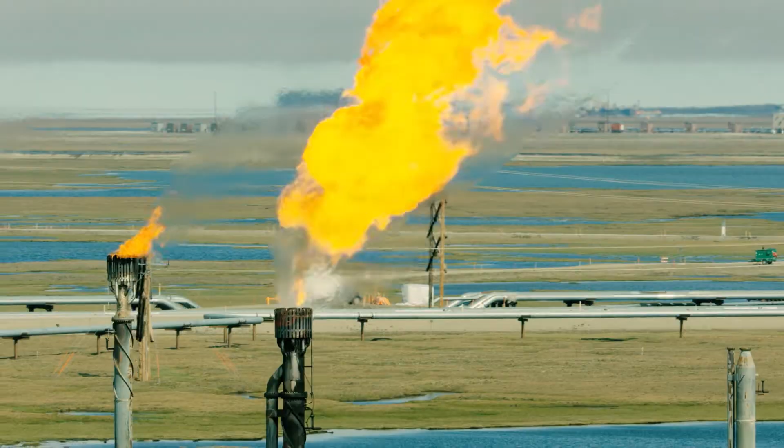Gas producers strive to ensure maximum supply efficiency. The cost of the gas is directly dependent on several important parameters. A key cost indicator is the humidity of the gas during transportation.

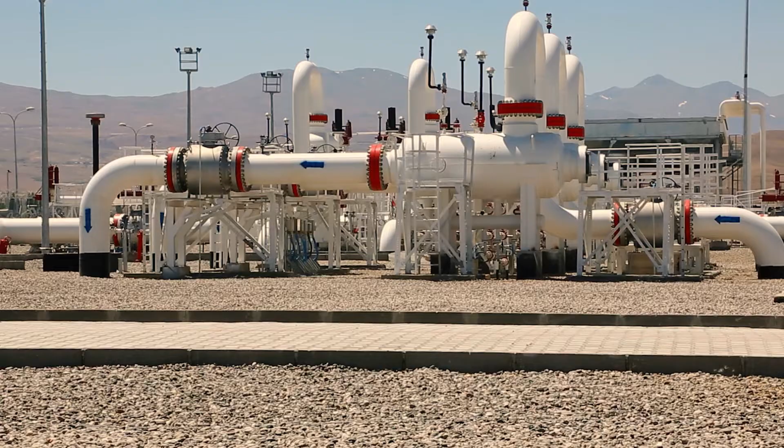This parameter must be constantly monitored because moisture condensation in the gas pipeline leads to the formation of hydrate plugs. This can cause obstructions in the gas flow, increasing the risk of accidents.

In addition, it has become increasingly necessary to install modern gas analyzers that have the ability to measure the hydrocarbon condensation temperature with a high degree of accuracy.

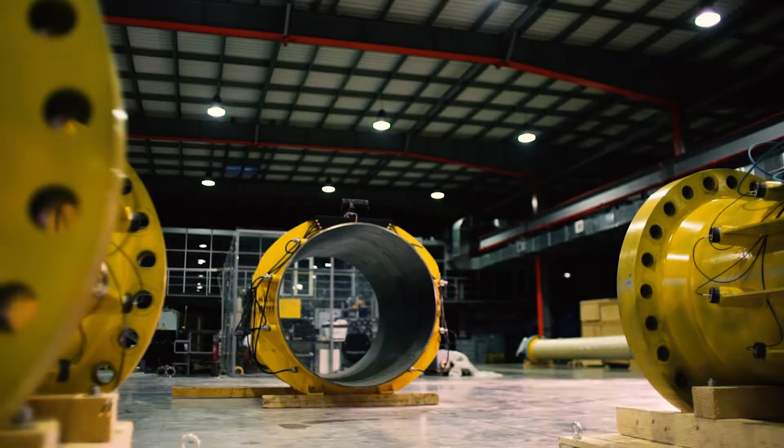Today, the most accurate method for measuring these parameters is the condensation method. This uses an optical system to register condensate formation on a chilled surface. This method is a first principle measurement. It is straightforward, reliable, and resistant to harsh conditions.

The traditional version of this method for measuring the water dew point is simple. The measurement cell of an optical system incorporates a metal mirror, the temperature of which can be regulated. A sensitive temperature sensor is integrated into the mirror. Heating and cooling of the mirror is achieved by means of a thermoelectric battery.

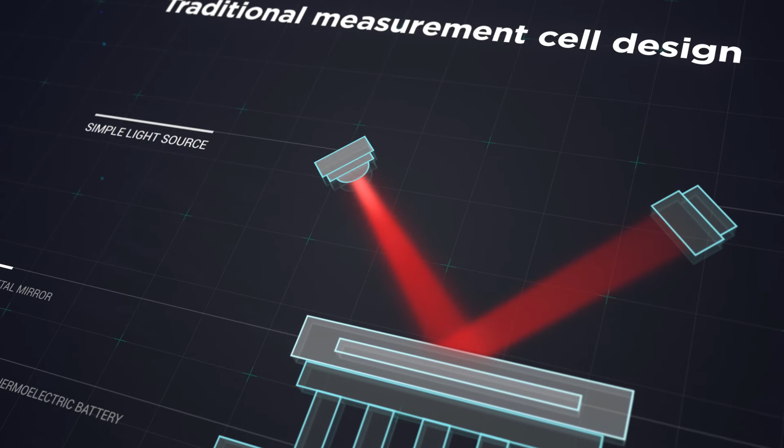A light-emitting diode, or LED, is used as a light source, and a photodiode is positioned to receive light from the LED as it is reflected from the mirror. When the mirror is clean, virtually all the light from the LED is reflected by the surface of the mirror onto the photodiode. This results in the photodiode producing a maximum level of photoelectric current.

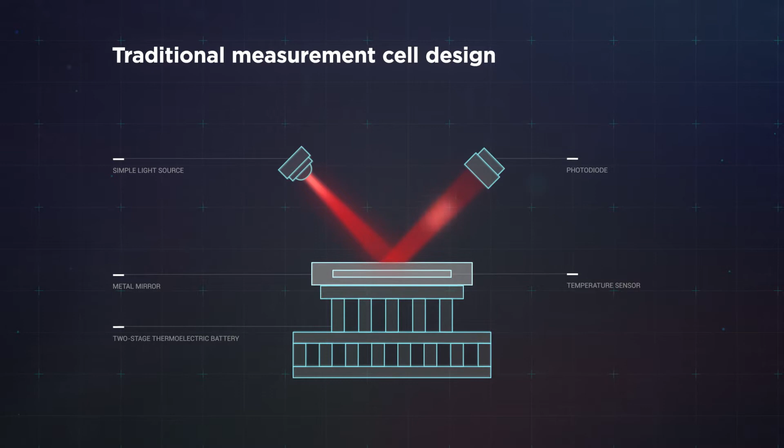But as the mirror is cooled, any water vapor begins to condense, forming droplets on the mirror's surface. These droplets act as tiny lenses that scatter the light from the LED. As a result, less of this light reaches the photodiode, and the photoelectric current it produces goes down. The mirror temperature at which the photoelectric current begins to decrease is registered as the condensation temperature.

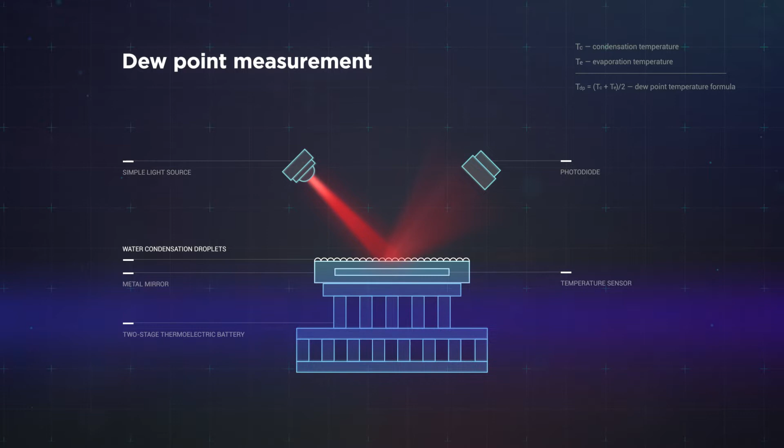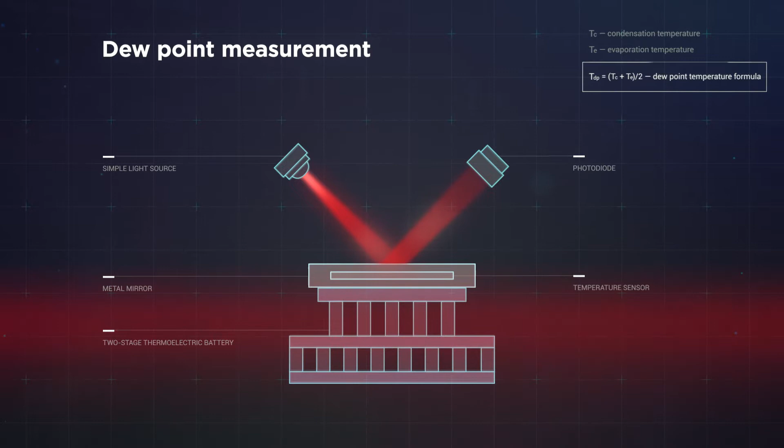Subsequently, when the mirror is heated, the reverse process takes place and the droplets of condensation evaporate. As this happens, the light from the LED is no longer scattered, and the amount of light that reaches the photodiode goes up again, resulting in an increase in the photoelectric current it produces. The temperature at which this increase begins to occur is registered as the evaporation temperature. The average of the condensation temperature and the evaporation temperature is reported as the water dew point.

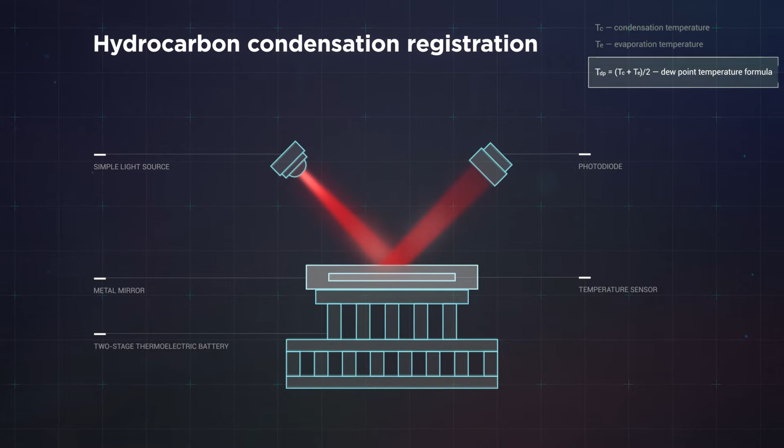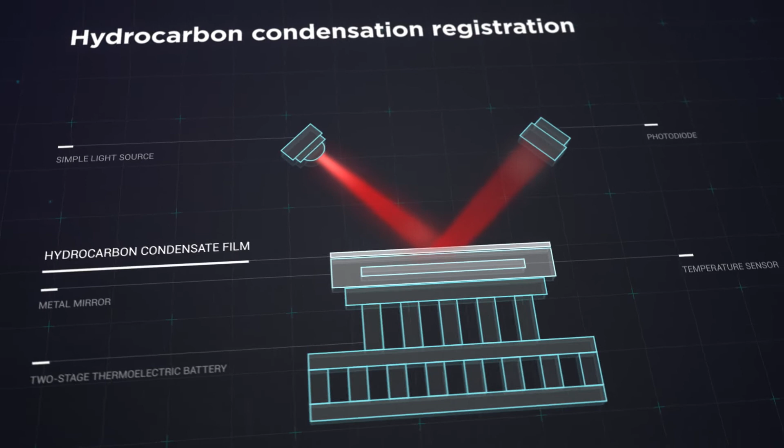But this type of setup doesn't work for hydrocarbons. During condensation, hydrocarbons do not form droplets, but a thin reflective film that does not scatter the light from the LED. Because of this, the amount of light reaching the photodiode does not decrease, so the beginning of condensation cannot be identified.

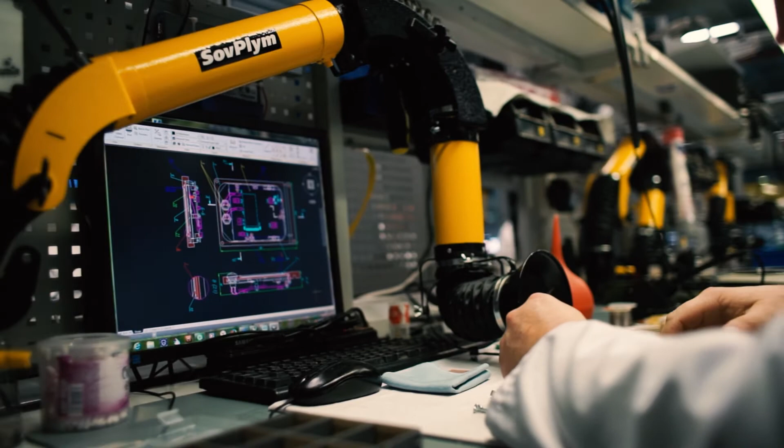A revolutionary method for measuring the hydrocarbon condensation temperature has been developed by the Vympel company. This method uses laser-based interferometric analysis and is based on the phenomenon of total refraction. Vympel's design features a vertically polarized laser as a light source and a chilled mirror made of a dielectric material.

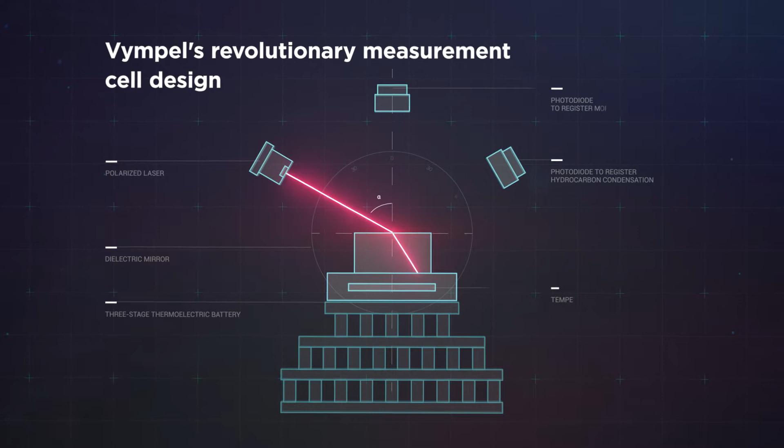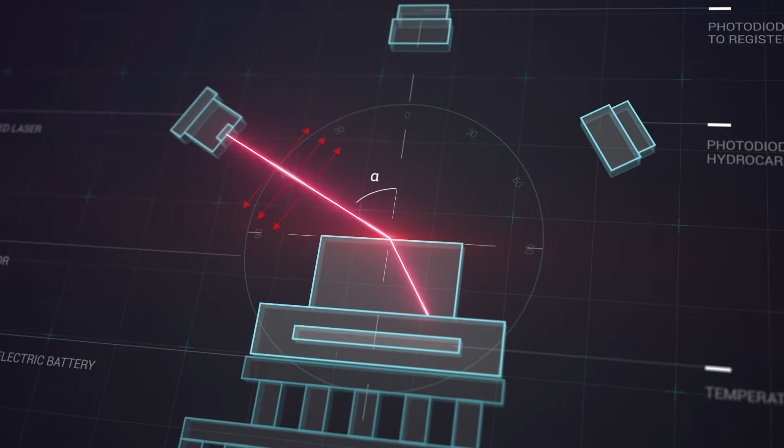The vertically polarized light from the laser strikes this mirror at a specific angle, known as the Brewster angle. This results in total refraction of the laser beam. When the mirror is clean, the laser beam encountering it at the Brewster angle is totally refracted. As a result, no light is reflected onto the photodetector, and it registers a zero signal.

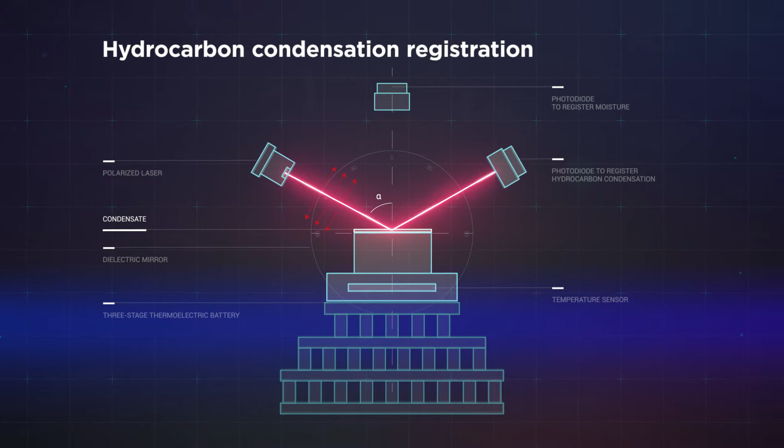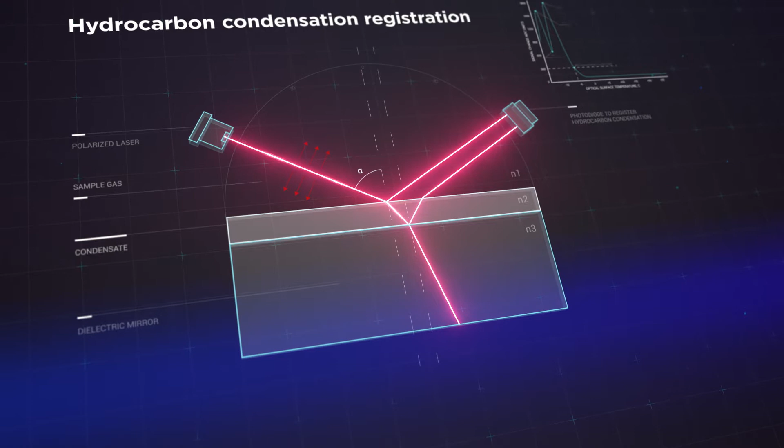But when a hydrocarbon film condenses on the mirror, total refraction does not occur. The light waves of the laser beam are partially reflected at the gas-film interface. At the same time, due to the optical transparency of the hydrocarbon film, a second beam of light appears following a slightly altered path. These waves are partially reflected at the film mirror interface.

As a result, the photodetector receives two distinct reflected beams of light, which are out of phase, and these beams generate a pattern of interference.

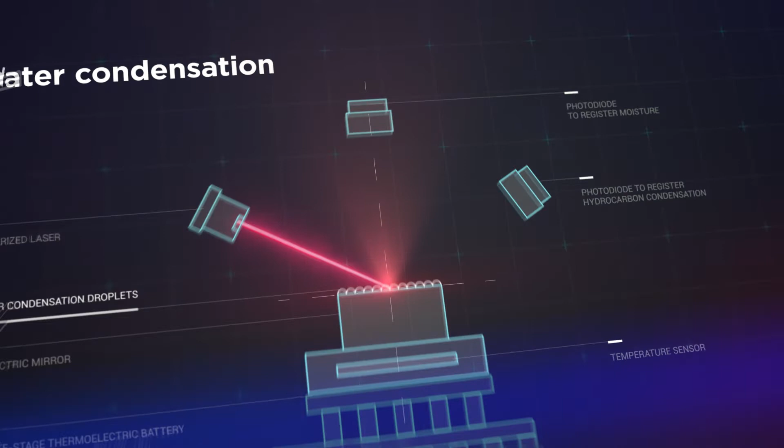The registration of water condensation is slightly different. As the mirror cools, when water droplets begin to form, the light from the laser is scattered. This dispersed light is received by multiple photodetectors, which are positioned at different points around the mirror. The more droplets there are, the more scattered light falls on these photodetectors. The system registers light reaching these photodetectors as water condensation.

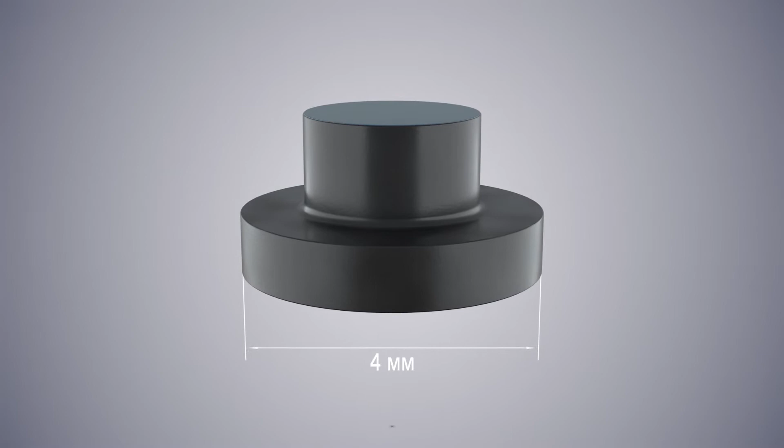The mirror in a Vympel device is a polished silica disc with a diameter of only 4 millimeters. The components of the optical circuit are assembled into a compact measurement cell. For instruments equipped with visual registration, hydrocarbon condensation is observed under vertical lighting.

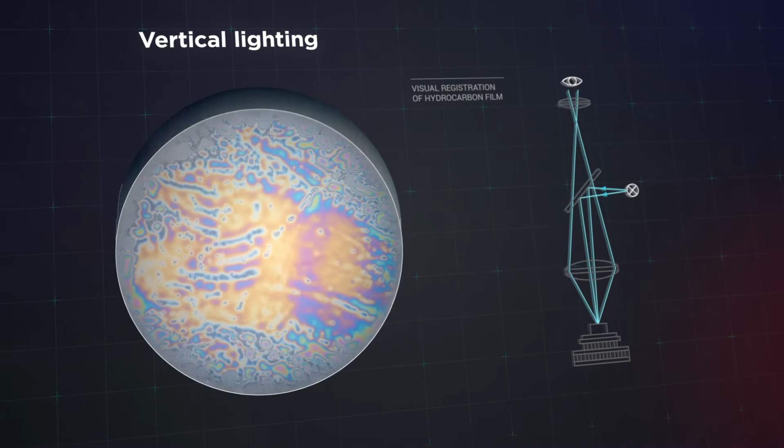When a hydrocarbon film begins to form, iridescent patterns appear on the mirror. The hydrocarbon condensation temperature is measured when the film thickness is approximately 5 to 10 nanometers.

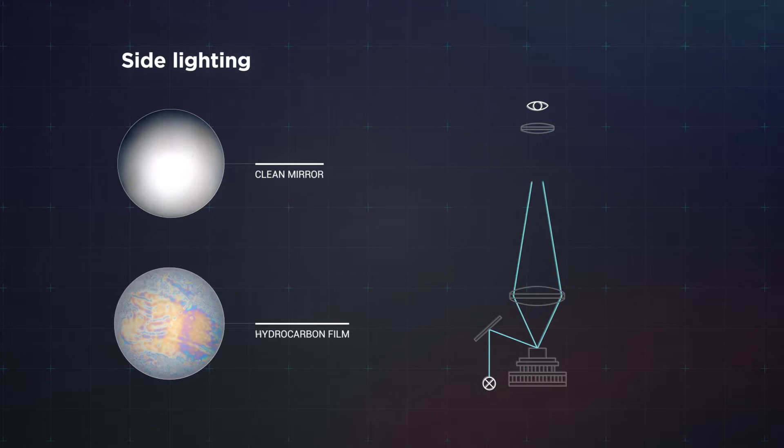For observing water condensation with the visual registration system, side lighting is used. Under side lighting, water condensation appears as a spray of tiny red dots uniformly distributed across the center of the mirror. Under vertical lighting, water condensation is also visible, appearing as tiny dark spots on a light background.

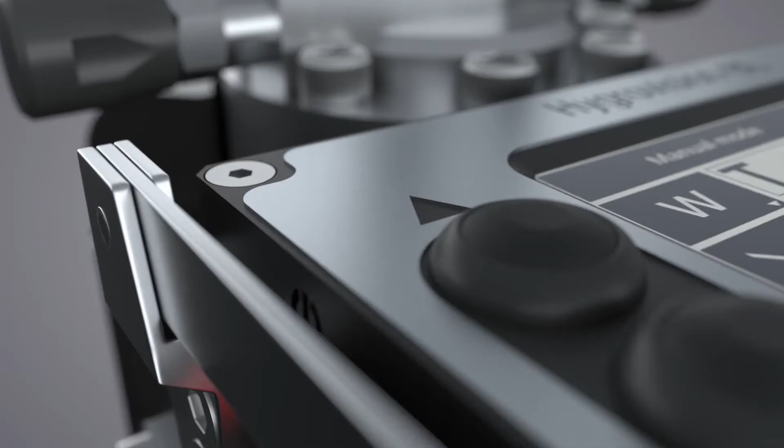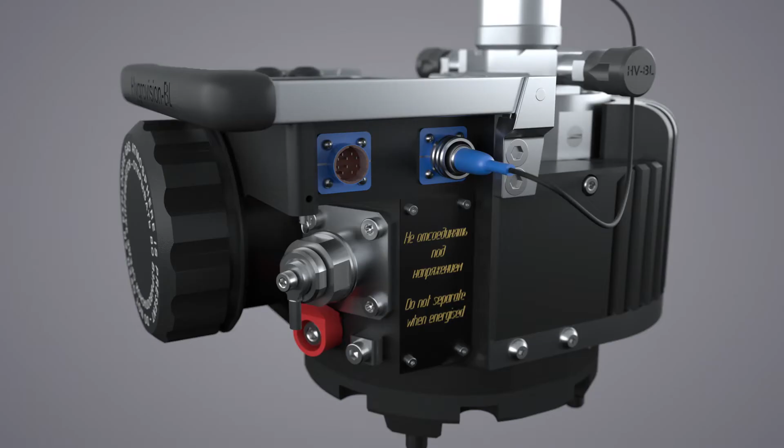Vympel dew-point hygrometers come in a range of models, each one having its own unique characteristics. All of these instruments provide a high level of accuracy and measurement quality for any technological area and under the most challenging conditions. The Hygrovision BL dew-point hygrometer incorporates all of Vympel's most advanced developments in one device.

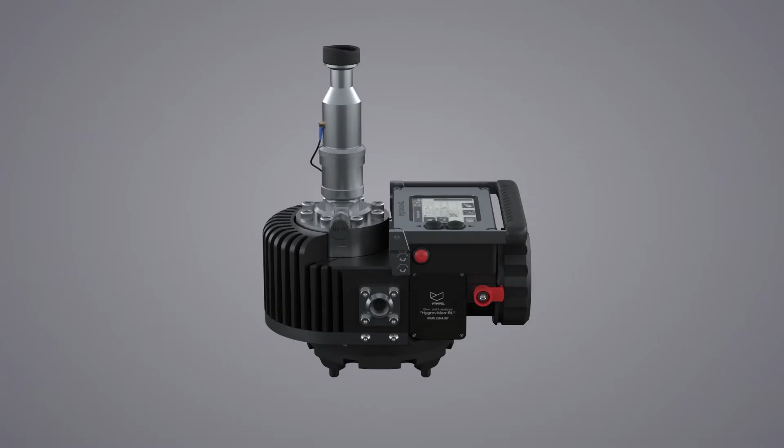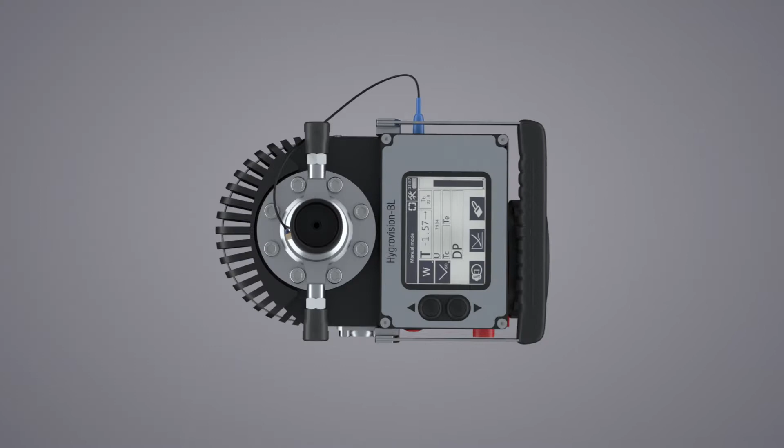The unique registration system in the Hygrovision BL integrates the optical system found in previous generations of Vympel devices and a visual registration system that features a 40-power microscope for high-resolution observation of the mirror's surface. An onboard battery provides for up to 8 hours of continuous operation. The Hygrovision BL can also be connected to an external power supply. Should this supply be interrupted, the analyzer will automatically switch to battery power.

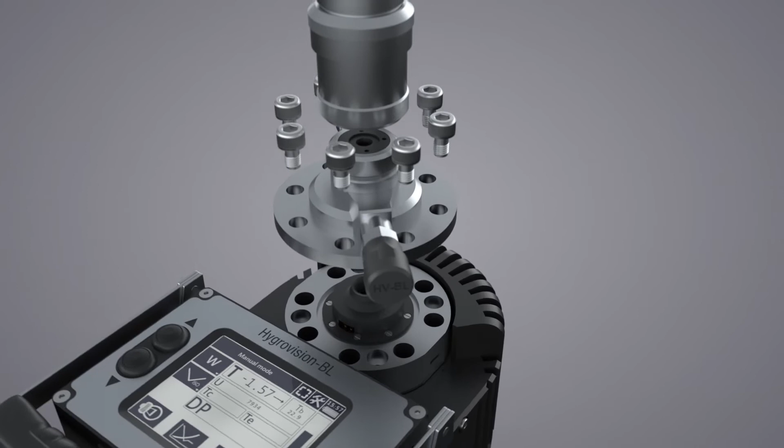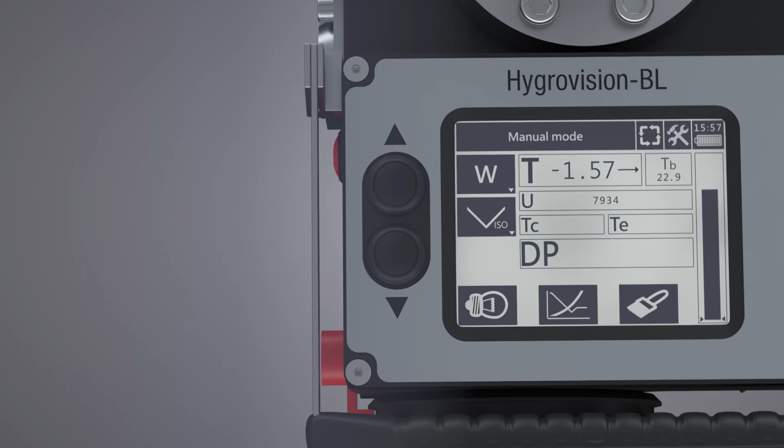This makes the Hygrovision BL essential equipment for those sections of the oil and gas infrastructure where continuous measurement of gas humidity is required. In order to have a clear view of the condensation mirror, the microscope is mounted directly onto the high-pressure chamber. Measurement processes, including changes in mirror temperature, are controlled by an electronic unit. This unit is operated by means of buttons and a touchpad.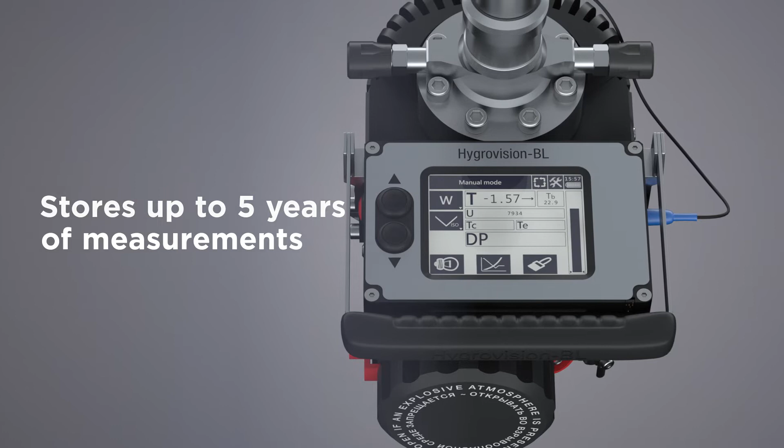The Hygrovision BL has been selected as a standard of comparison for International Gas Humidity Reference Standards for COOMET, or Cooperation for Metrology member countries.

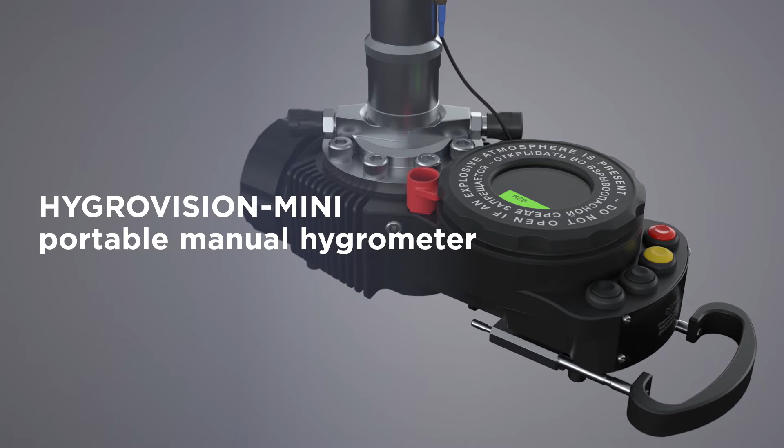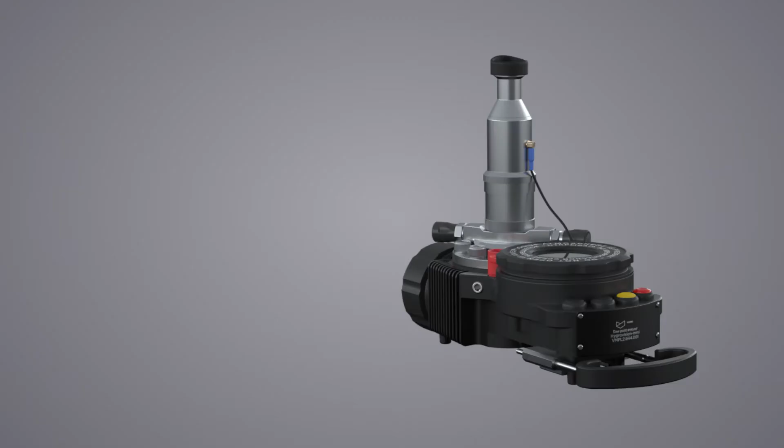The Hygrovision Mini portable hygrometer was developed for taking spot checks in the field and as a reference analyzer for checking the results reported by online automatic hygrometers. The Hygrovision Mini incorporates the condensation method of dew-point measurement. Equipped with a 40-power microscope, the Hygrovision Mini provides for both vertical and side lighting, making it easy to clearly distinguish between water and hydrocarbon condensates.

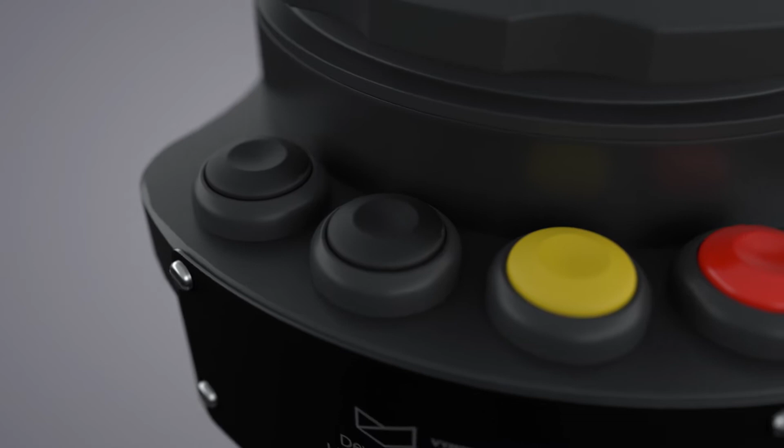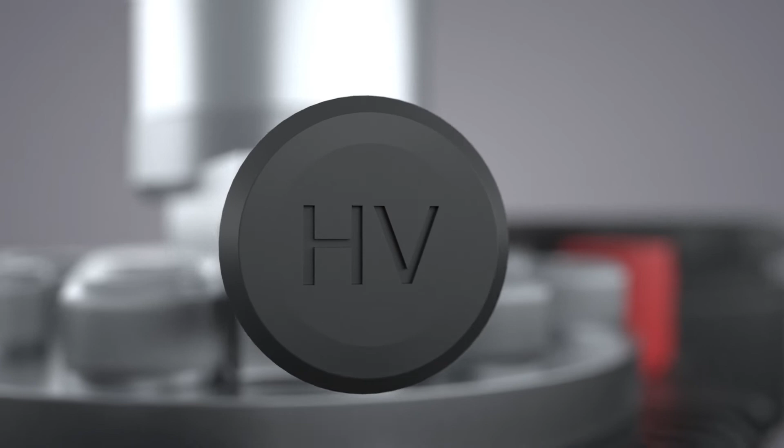The lightweight portable instrument is conveniently operated by means of a keypad and display. Heating and cooling of the mirror is accomplished by a thermoelectric battery, eliminating the need for cumbersome refrigerants. Moreover, thanks to semi-automated features, the rate of cooling and heating of the mirror can be preset, allowing the operator to use the Hygrovision Mini to make measurements in accordance with GOST or ISO standards.

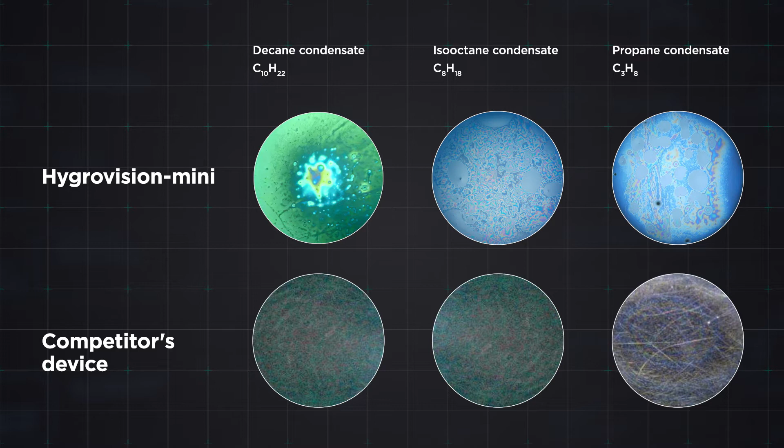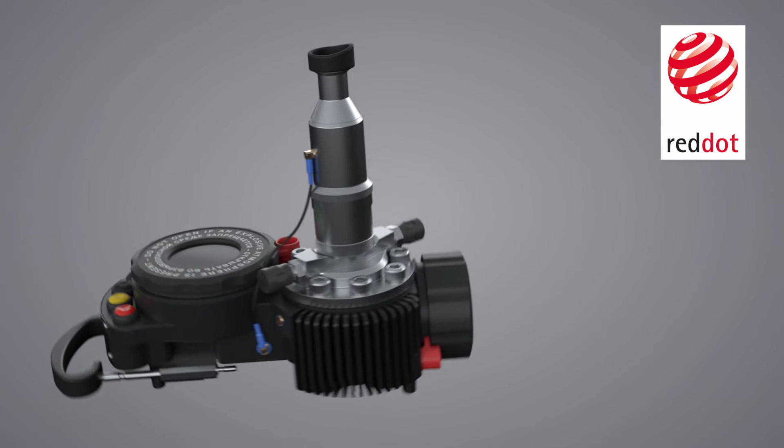The advantages of including vertical lighting in the visual registration system become apparent when comparison is made to the simple dew-point testers offered by competing manufacturers. For example, when the mirror is supercooled by 1 to 2 degrees Celsius in relation to a given dew point. In 2015, the Hygrovision Mini was awarded the prestigious Red Dot Award in the category of industrial design.

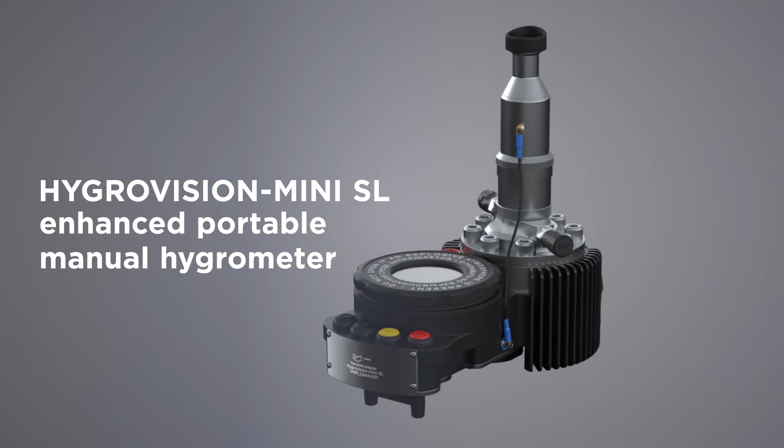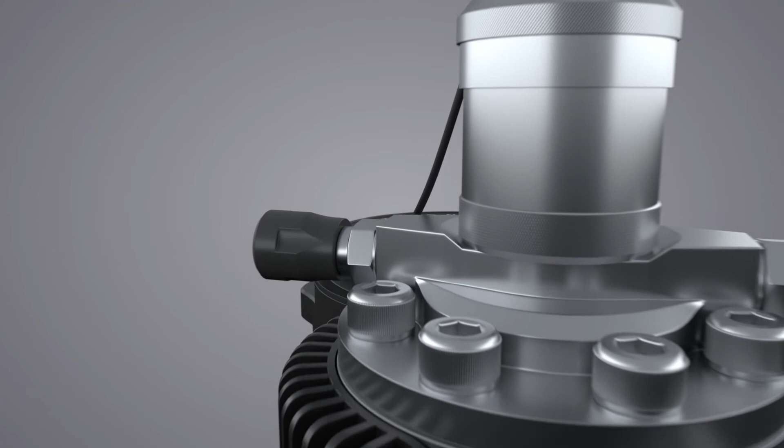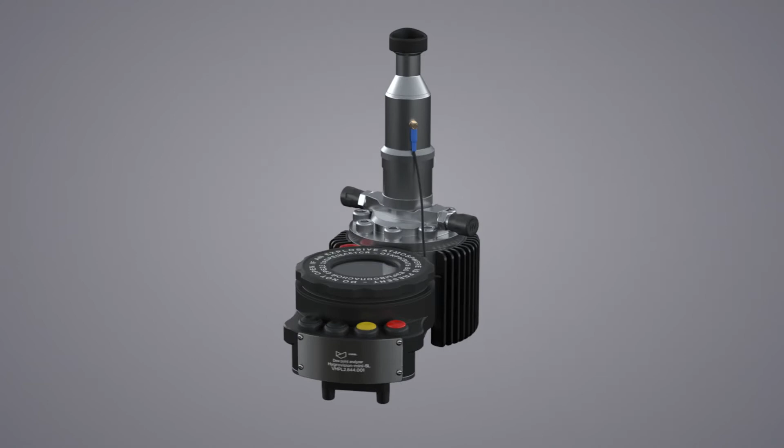For measurements in more extreme conditions, the Hygrovision Mini SL was developed. Based on the standard Hygrovision Mini, the SL model is suitable for taking manual dew point measurements under high pressure conditions. A special feature of the Hygrovision Mini SL is the incorporation of an enhanced side lighting system. With this model, it is possible to take measurements of the hydrocarbon condensation temperature and the water dew point at high pressures that are just as accurate as those made at atmospheric pressure.

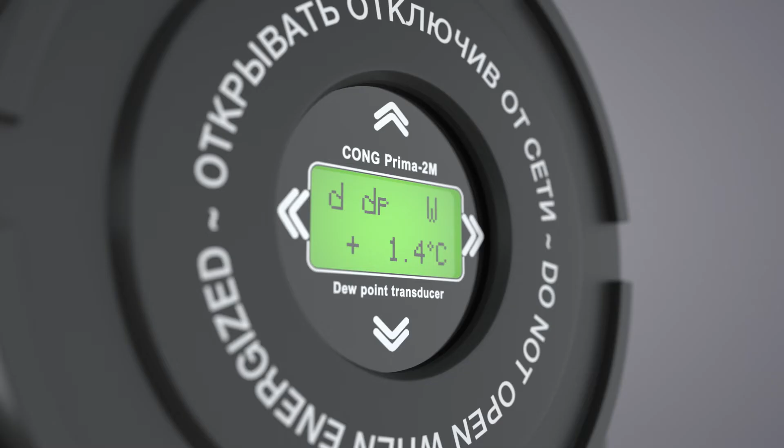The CONG Prima 2M hygrometer stands out from all competing dew point analyzers. The CONG Prima 2M is equipped with self-diagnostic functions for monitoring the state of the sensor and analysis of the electronics. The surface temperature of the condensation mirror can be depressed by more than 70 degrees Celsius at operating pressures up to 160 bar, performance that surpasses its nearest rivals.

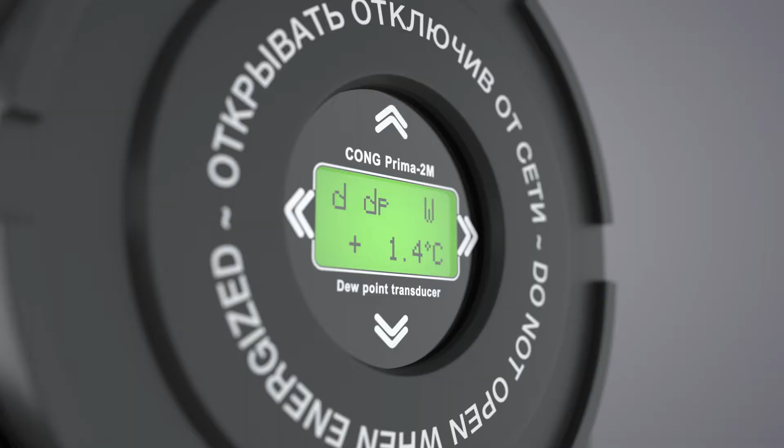The CONG Prima 2M is easily integrated into any telecommunication system via digital output using a Modbus protocol or via 4-20 mA analog communication. The CONG Prima 2M dew-point analyzer is compact, lightweight, and has 3 measurement modes: water dew point mode, hydrocarbon condensation temperature mode, and alternating mode for measuring both the water dew point and the hydrocarbon condensation temperature alternately. The operating menu can be accessed and controlled by means of 4 magnetically activated buttons using a magnetic key.

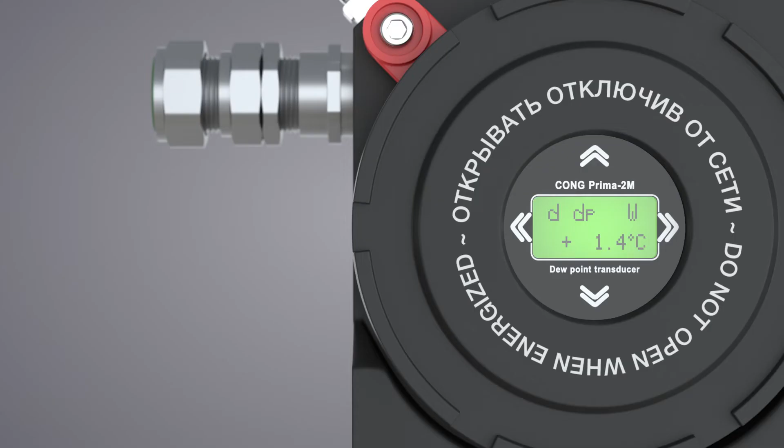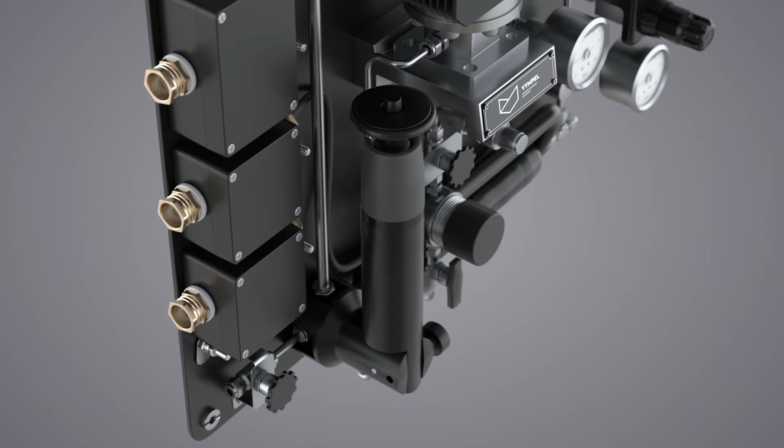In order to remove mechanical and aerosol impurities from sample gas, and to efficiently supply a representative gas sample to an installed analyzer at either operating or reduced pressure, Vympel has developed the SGA-003 gas preparation system. Installation and connection points are designed to accommodate CONG Prima, FAS, and Hygrovision series analyzers.

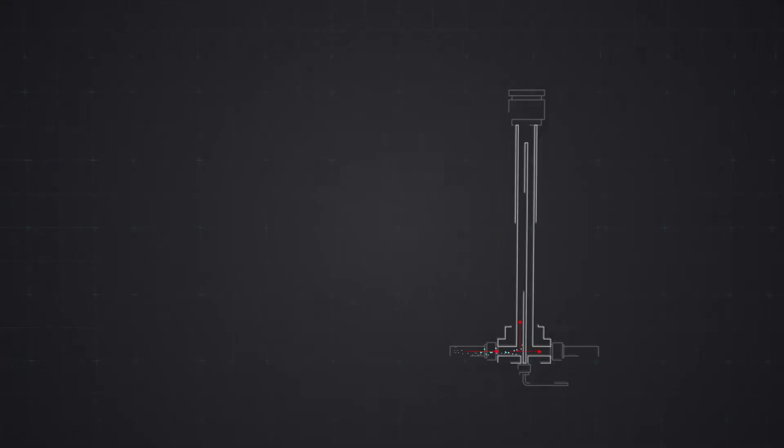The SGA-003 system features an inertia gravity filter, which consists of a horizontal tube and a vertical tube. Heavier mechanical impurities are filtered out when the gas changes direction from the horizontal tube to the outer vertical tube, changing both direction and speed.

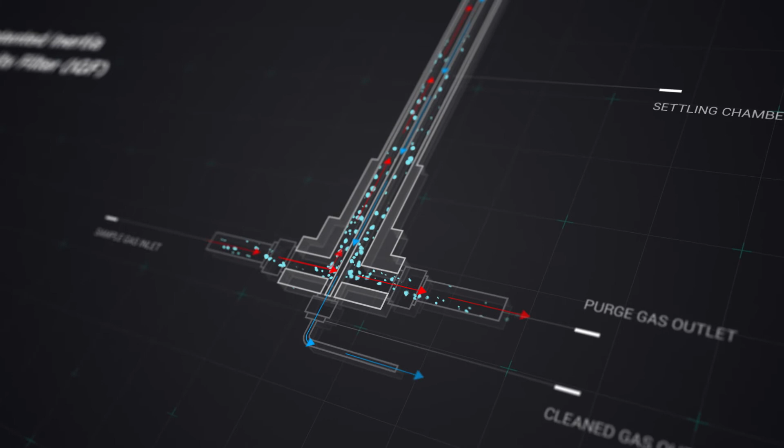As the gas slowly fills the vertical tube, lighter contaminants and liquid aerosols in suspension precipitate out and are eliminated. Purification of the gas without passing it through a filter cartridge or membrane eliminates the risk of sample distortion.

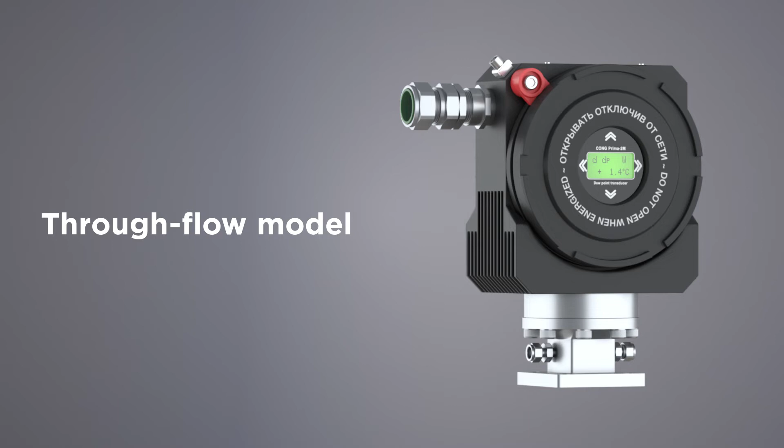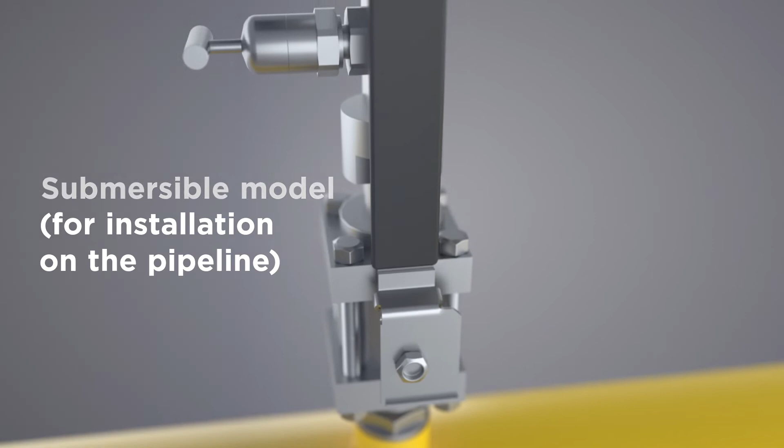The CONG Prima-2M is available in 3 configurations: flow-through for installation into systems that supply the analyzer with a purified gas sample, flow-submersible for installation directly on the pipeline without interrupting the gas flow. In addition, thanks to Vympel's latest innovations, its alternative can be designed to provide zero-emission sampling. And flow-submersible with filtration for installation directly on a pipeline transporting gas that has mechanical and aerosol impurities.

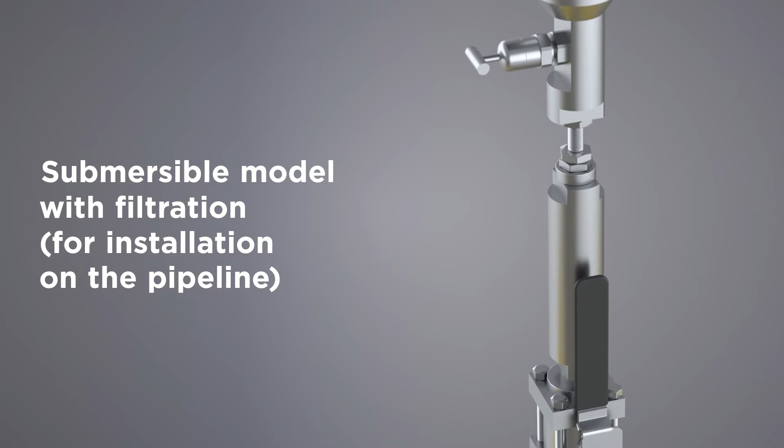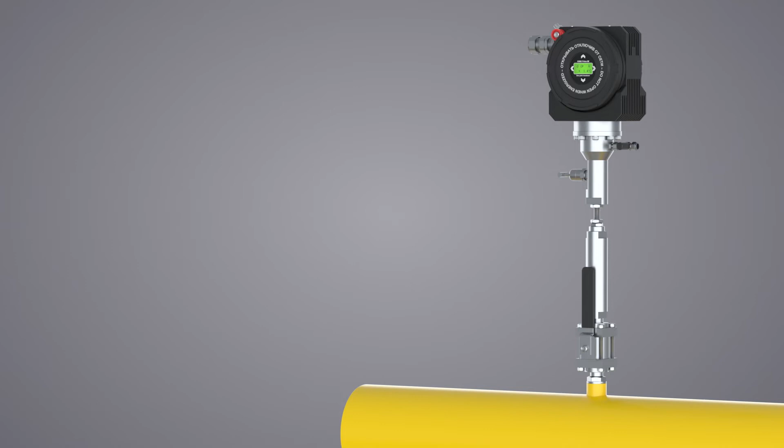Vympel analyzers have flame-proof enclosures, but the sample gas passes through lines located outside this enclosure. This type of explosion protection reduces the risk of accidents due to gas accumulation inside the enclosure.

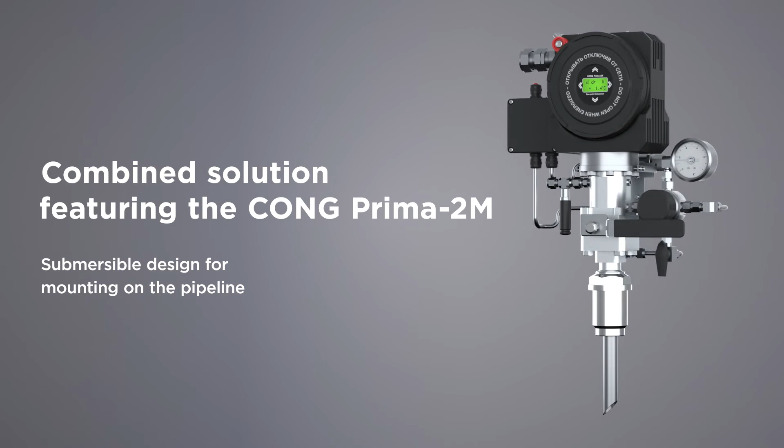Vympel has developed a solution that provides for water dew point and hydrocarbon condensation temperature measurements, comprising a combined system with CONG Prima-2M analyzer mounted directly onto the gas pipeline. Measurements are taken automatically in alternating mode. One mirror and one optical system for both measurements.

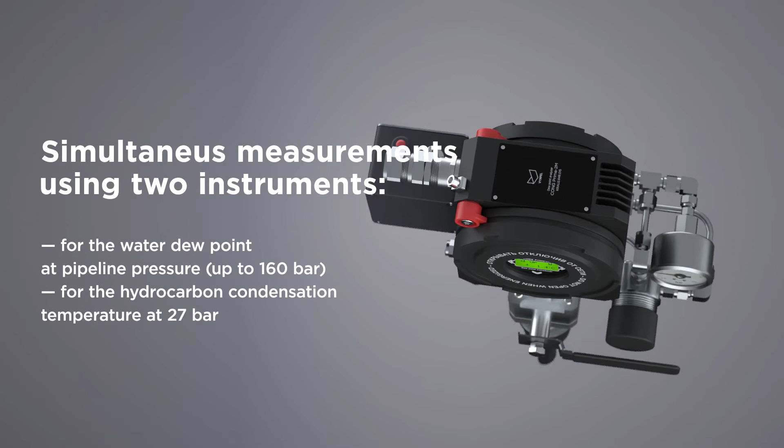In this way, the device performs the function of 2 analyzers, one of which reports measurements at the operating pressure in the pipeline, and the other at a pressure of 27 bar. The pressure requirement for measurement at 27 bar is achieved by means of a pressure reduction system.

If the gas is not purified, the combined system can be equipped with a filtration unit based on an inertial gravity filter. A service unit recalculates the water dew point measured at 27 bar to the operating pressure of the pipeline. The service unit can be used with Vympel analyzers as a secondary unit to provide not only conversion and recalculation of measured values, but also additional data interfaces and a display.

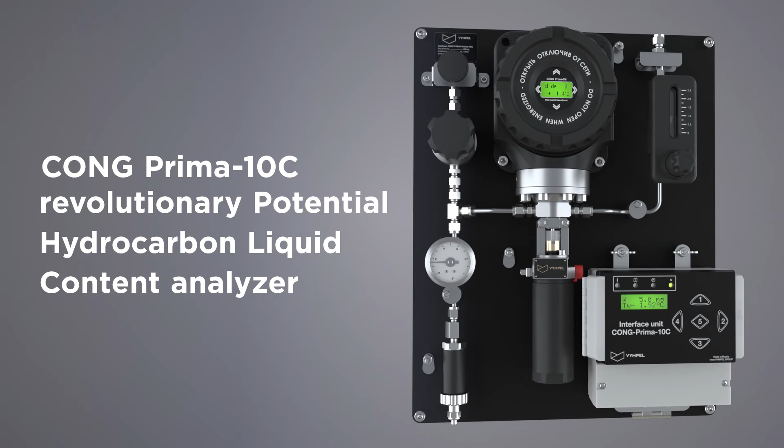The CONG Prima-10C is the world's first online analyzer for measuring potential hydrocarbon liquid content in natural gas. The CONG Prima-10C registers not only the hydrocarbon condensation temperature, but also other parameters as well. Given additional information about the temperature, pressure, and gas density, the analyzer calculates the amount of liquid that can be obtained from 1 cubic meter of natural gas.

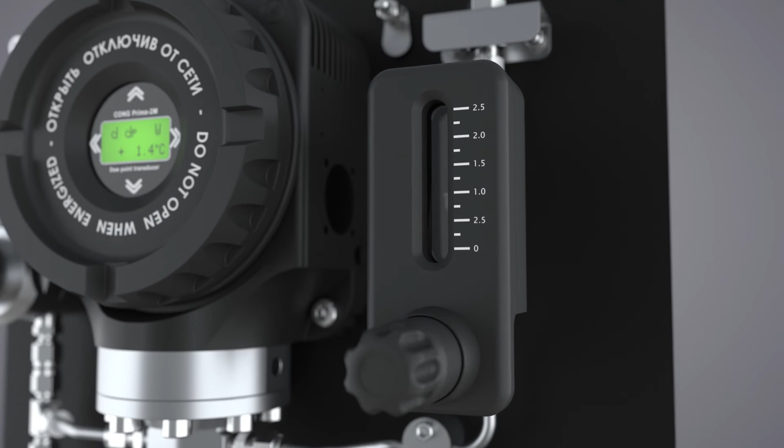The CONG Prima-10C is easy to operate, has an ergonomic, user-friendly control unit, and features both analog and digital outputs. This analyzer can be connected to a process computer, a maintenance panel, and a monitoring and measurement control room.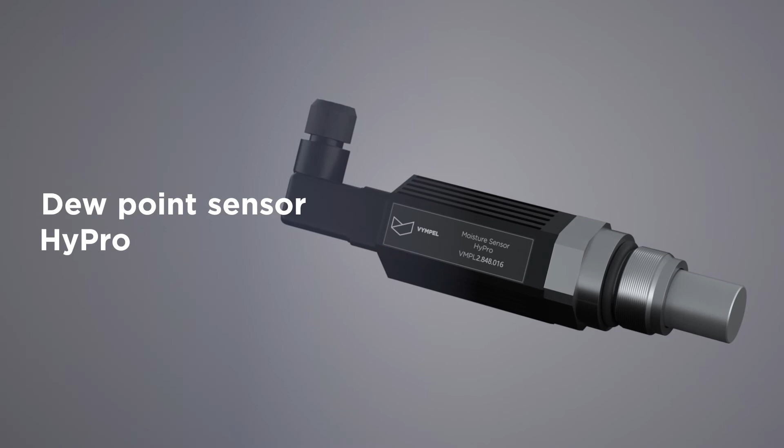As a supplement to its range of unparalleled chilled mirror dew point hygrometers, Vympel has developed the HyPro sorption-type moisture sensor. The HyPro is designed to measure the water dew point at temperatures down to minus 100 degrees Celsius and at operating pressures up to 300 bar.

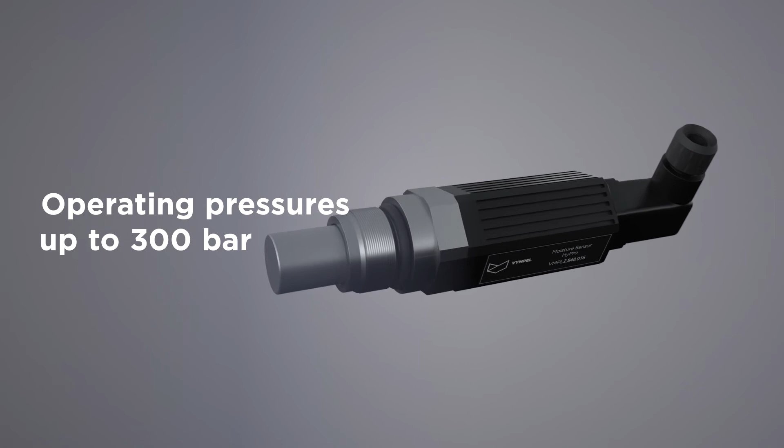This sensor is designed mainly for measuring the moisture content in inert and aggressive gases, including those containing hydrogen. HyPro sensors are also an ideal choice as a cost-effective solution for natural gas treatment processes.

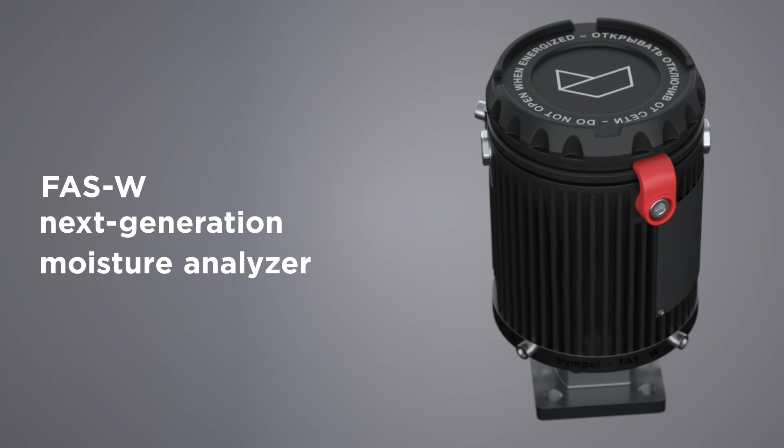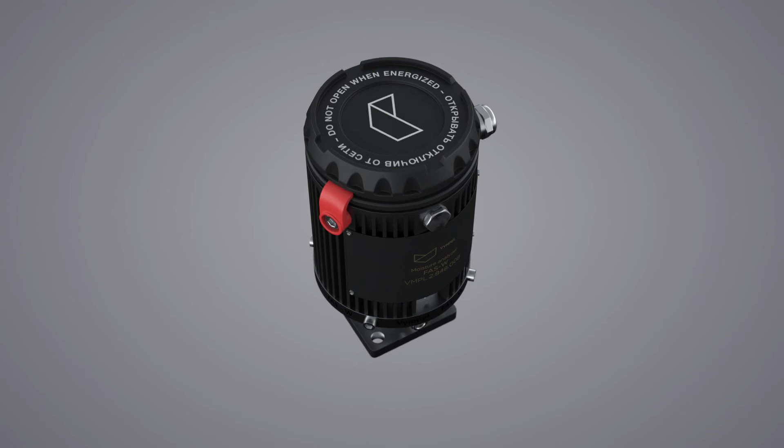The FAS automatic analyzer provides a combination of advantages. This compact and economical chilled mirror solution provides superior measurement results for process applications. The FAS can report gas humidity in terms of dew point and volume fraction of moisture. This analyzer can measure dew point over a wide range with an increased sensitivity to water vapor condensation.

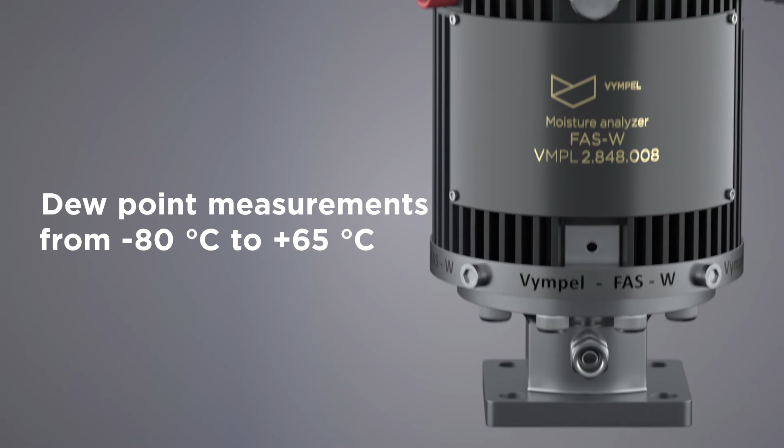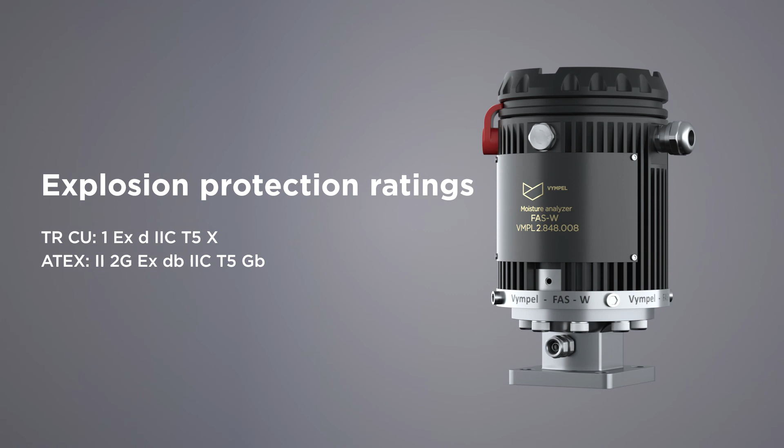This ability is achieved through a reduction in the surface area of the chilled mirror, making it possible to lower the temperature by up to 95 degrees Celsius. This is an unparalleled degree of cooling for an online condensation hygrometer. A high level of explosion protection allows the FAS to be used for explosive media, including those containing hydrogen.

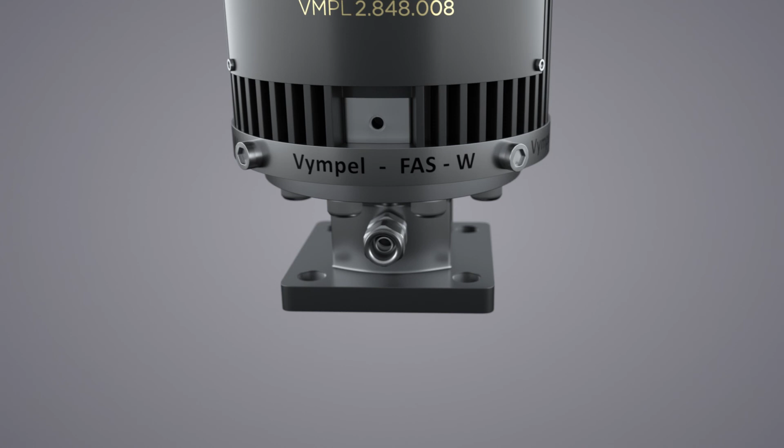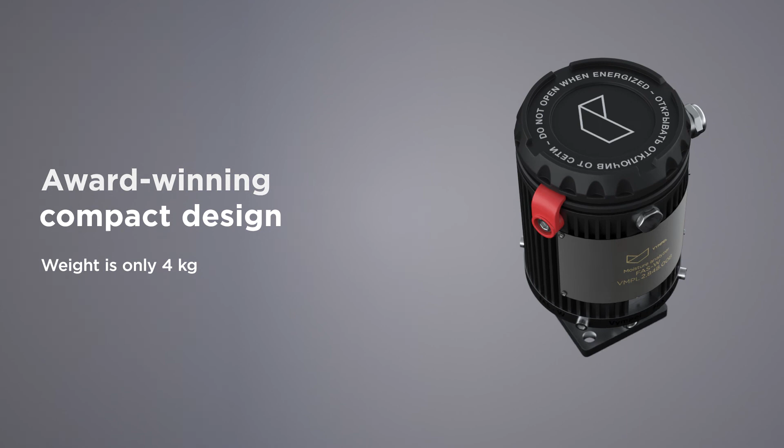This analyzer includes a built-in alarm, which alerts the operator to malfunctions and possible process violations. The FAS is compact, easily moved, and lightweight. It can be outfitted with a gas preparation system and can be installed directly on the pipeline, mounted on a submersible gas sampling probe with or without filtration. In 2020, the FAS analyzer won the prestigious Red Dot Award for product design.

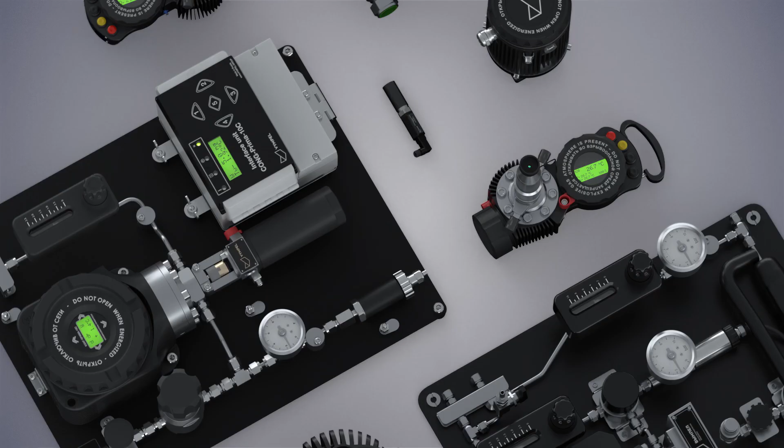Vympel dew-point analyzers and solutions incorporate proprietary technologies and innovations that have been developed by Vympel engineers and are protected by international patents. These high-precision instruments are supplied to more than 60 countries around the world. Prima, Hygrovision, Pro, and FAS, solutions that are unequaled and irreplaceable.